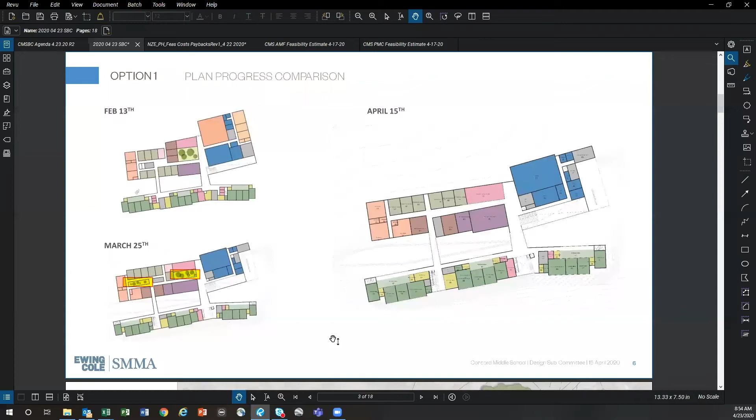If we go to the next one, just generally talking through with Laurie and Justin in terms of how the building was organized - no other major adjustments. It has a very nominal impact on the building siting. Go again, and then just a little bit more in detail.

I would say one of the things that becomes increasingly more relevant in our discussions with the educational team is the relationship between what's called on-team and off-team classrooms, and then not only team fidelity, but grade fidelity. So one of the issues with this option - not an issue, but something to consider - is the relationship of the off-team classrooms, which is essentially world language, and their relationship to the teams. So that was noted here.

So if we go forward to the next one - this option also carries the highest cost per square footage, and I think it's driven by exterior surface area, though I'll let the estimators comment more fully. Now, relative to time, I don't know if we have time to go through all four options. Do we have any more summary level on this?

Yeah, we do. So option two, I think, is important in that we didn't really make any true adjustments to it. So you can go to the next slide. Again, no modification to the position on the site, no major organizational changes.

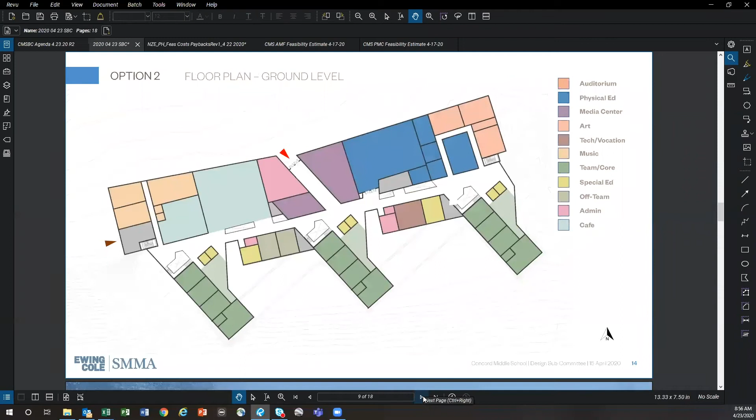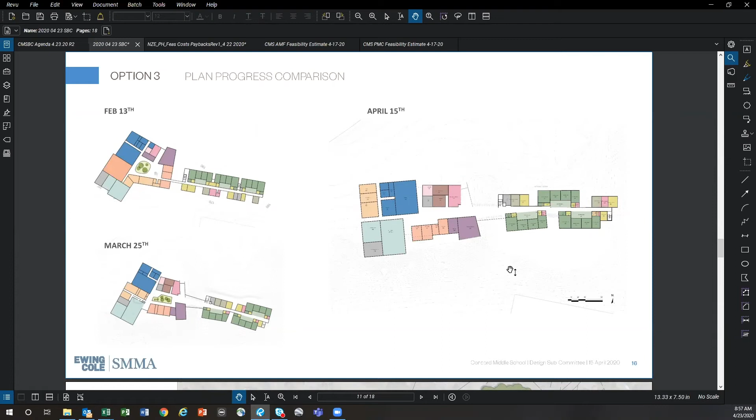You go two forward - option three was a little more significant in terms of the opportunity to make some adjustments. What we did there was significantly rotate the building to have a much more preferred solar orientation. We removed the interior courtyard from the western side, and rearranged the relationship of teams within the educational community on the right side of the building. Putting the community pieces there, it's interesting that option three right now sits at the lower end of the cost range and creates a fairly dynamic arrangement of the learning communities.

If you can go to the next one - actually, go back one please. You can see the rotation of the scheme is much more effective in terms of its solar orientation and its relationship to the street. So this one has really advanced, and we did that in an area-neutral way - we didn't increase the square footage or any of those things. Okay, if we can go to option four.

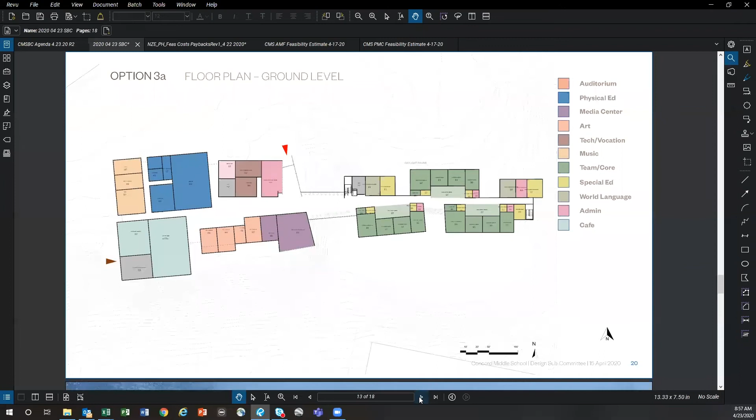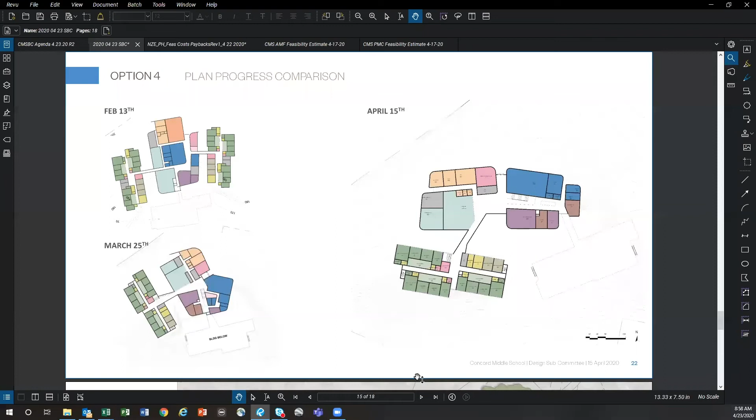Option 4 faced some criticism, rightly so, about the orientation of the learning communities, as a fair amount were receiving Western sun. So we looked at what happens if you're able to rotate the building a bit to increase those orientations. It has a slight impact on the organization of the more public component of the building, the gym, the cafeteria, the media center. But we think if you go to the next one, that solar orientation is improved.

Let me just say a few other things here. I know what is on the table, you're considering integration of building options. So we have forwarded a memo to Kristen about that. I don't know if it's made its way to Hill or to your team, but we think that you can incorporate those building options into any of the concepts. I'm willing to entertain any questions about the building options.

This series of work from April 15th is not reflected in the cost estimate. I think those things, except for the removal of the courtyards in concept 1, didn't really change the estimating assumptions since March 25th. But I do think things like building volume and building surface, which we have proposed to Hill, Fogarty, and PMC as cost reduction strategies, are applicable to all of the concepts.

Are there any questions on that? I just have a general question.

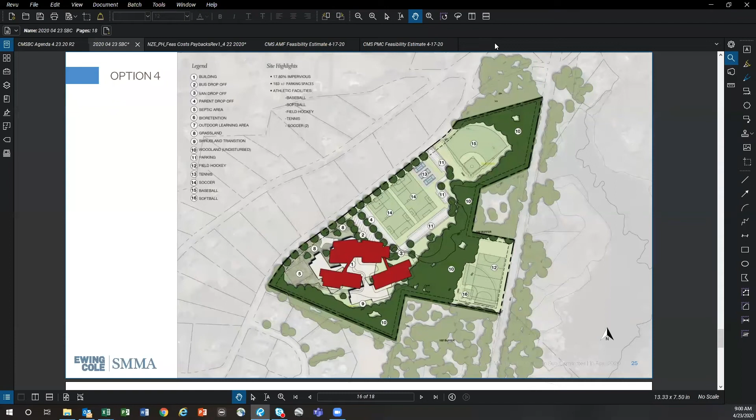I know that the educational team, Laurie and Justin, had a chance to look at these and make comments. For the team, could you share the preferable designs from an educational standpoint? Maybe Mike, Laurie, if you would just land on image 18, it shows them in relation to one another. That might be a helpful comparison.

You want me to answer that? Yes. So when Justin and I took the time to go through this, and then did it with the design subcommittee, essentially we were preferring options 3 and 4 because of the layout, not just of the teams, but as you can see, the grade level ends up being clustered. So if you assume what you're looking at is one grade level's worth of teams, and then they're 3 stories high, at least in option 3, you can see that the grade level becomes a community as well, more so than in the linear fashion in option 1, or in the fairly segregated fashion in option 2.

We were intrigued by option 4's ability to segregate off the 6th grade. If you look at the perforated line down to the bottom right, you can see the layout of what would be a 1-story opportunity for our 6th grade set of teams. But as intriguing as that was, given the cost differential, we can be swayed. So option 3 might end up being our preference given those multiple factors.

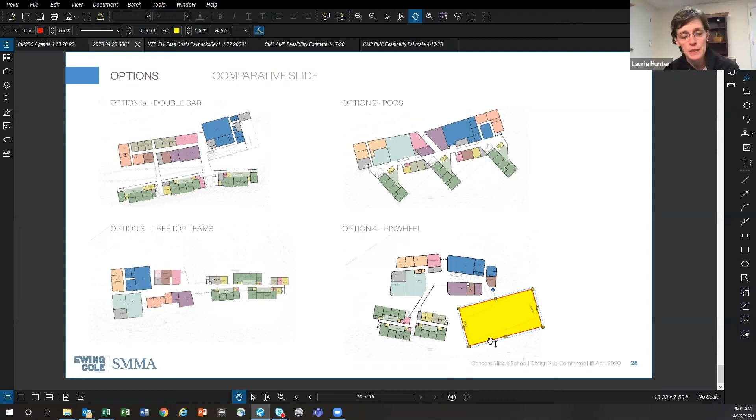Purely from an educational standpoint, we can't speak to the sustainability and those factors that are getting discussed. I think Laurie is speaking there for the education team as well as the design subcommittee. I think that captures it nicely.

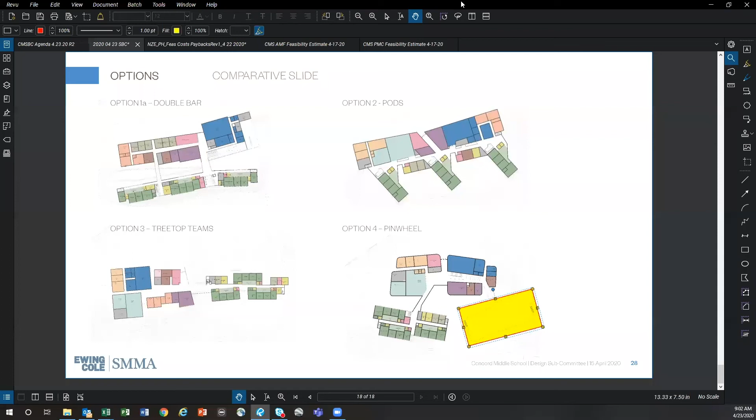Okay, so now it's at Mike. Now we're going to talk value management. Yeah, so we're going to talk value management here.